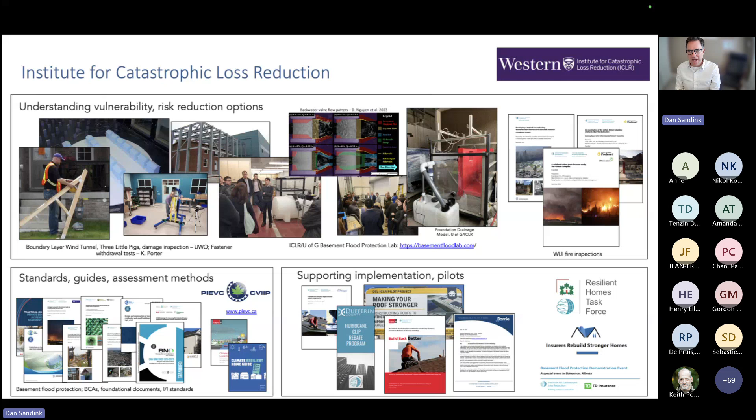One of the foundational issues we've been dealing with over the past few years is that we have guidance available for the insurance and building industries on reducing risk of the built environment, of homes, of low-rise structures, to the impacts of some of the most important drivers of loss in Canada, including wildfire, urban flood, high wind, and hail.

But that guidance typically has not been implemented. There are very few examples of where this work has been implemented.

To take an example, we've got the National Wildfire Guide for Canada, developed by NRC and released in 2021. We've got various standards focused on urban flood protection, like CSA Z800, guidelines on stormwater and wastewater system design to reduce risk from extreme events.

A few years ago, we were involved in the CSA S520 high wind protection standard for Part 9 buildings. And for many years, we've had guidance documents and testing standards for roofing products to help performance in hail events.

So despite the availability of this material and a general level of awareness in terms of what part of the country is vulnerable to these hazards, we've seen very limited uptake to date.

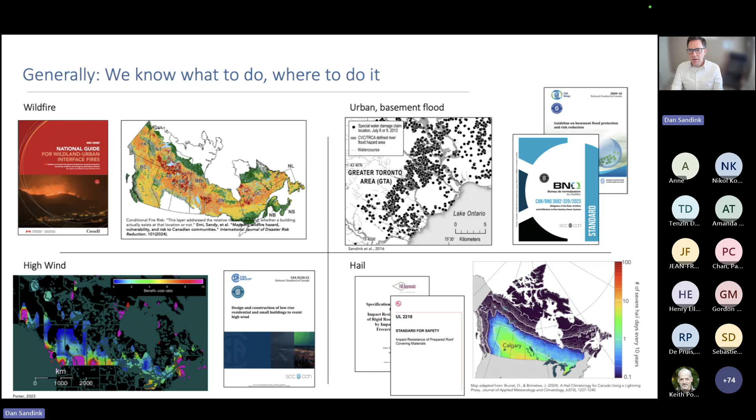So we approached the Canadian Home Builders Association a couple of years ago and proposed that we work together to find solutions to increase capacity of both the building and insurance industries to apply resilience practices for buildings, for new construction, for renovation, and for post-loss rebuilds.

We worked with CHBA to define what we called the Resilient Homes Task Force. This is a group of insurance industry executives and building industry executives, largely building company owners or senior staff, who helped us identify a roadmap to move from isolated application of resilience practices

to more mass adoption of resilience practices in these two industries.

The task force is composed of building industry executives and insurance industry executives. Our co-chairs are from the building industry, Alex Miller, who is CEO of Big Block Construction, based in Saskatchewan, and Susan Pinwarden, who is Managing Director of Personal Lines at Aviva Canada.

And I'm going to focus on a few outputs of this work today, notably the guidelines and the field trials. There are several other outputs we can talk about at some point in the future, but these two major outputs were considered by the task force to be the most important outcomes of the last couple of years of work.

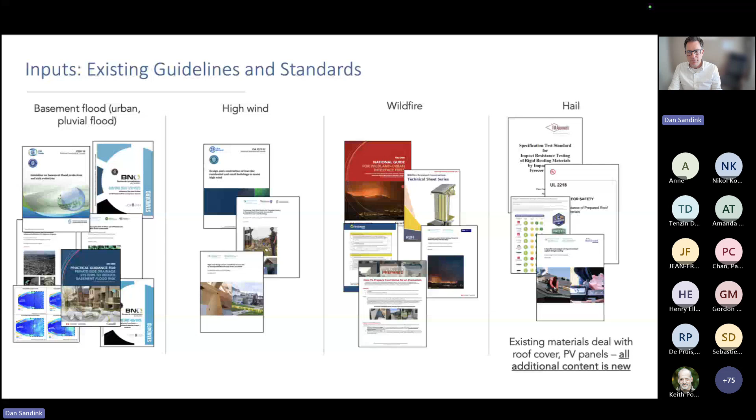Another important input for our guidance document. So the concern of the task force is that we produce practical guidance that can be adopted readily by a building company, by trades, by a restoration contractor, without a lot of interpretation by outside experts. In order to help with this, we put together what we called a pilot working group. This was more technical staff from building companies and insurance companies.

So we had a general technical support group with builders like Mattamy, Minto, Avalon, RDC, Doug Tarry Limited, Third Generation Homes, medium-sized and tract builders to help guide us how to present resilience practices in our guidelines and make sure that it's usable in the field. And we also had input from insurance partners, Aviva, Curo, and TDI as well in this task group.

We also brought in expertise from supporting groups like RDH, FireSmart Canada, for wildfire, for high wind. We worked closely with Sarah Stevenson from Canadian Wood Council, Doug Tarry and his team at Doug Tarry Limited, who had been leading a lot of this work for the construction industry in Ontario. For hail, we worked with the Northern Hail Project, Travis Engineering, as I mentioned before. And we also had input from large loss teams from some of the participating insurance companies like Co-operators who provided input to our guidance as well.

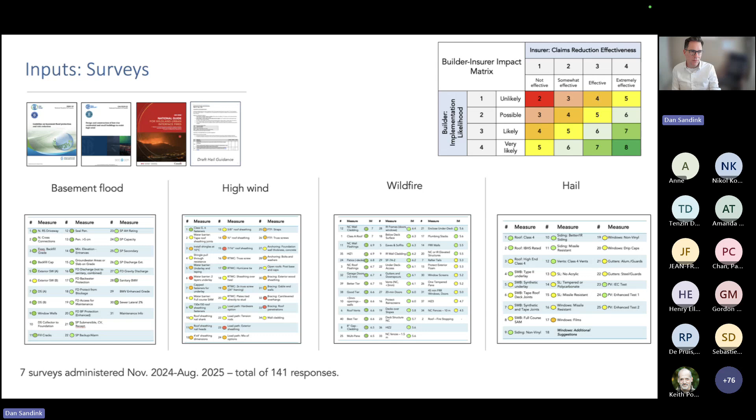The tables on the bottom of the screen are a summary of these inputs where we inputted the outputs of the surveys into this impact matrix, and then we're presenting this information. The more green you see, the more likely builders are to implement the measures, and the more impact the insurers reported that the measures would have on reducing claims frequency and intensity. And so again, that helped us prioritize options for our tiered resilience measures. We conducted these surveys from November 2024 through August of 2025, and we had about 141 responses, half from the building industry and half from the insurance industry. The building respondents were largely building company owners, and they were from across Canada in both cases.

Another sort of core piece of advice that we were acting on from our pilot working group was how to present options. And so this is a summary of their most important advice in terms of how to present options in our guidelines. They told us to use simple language, avoid technical terms like don't say 8d nails, just give a nail length, for example. Don't reference testing standards if you can avoid it. Assume users of these guidelines don't speak English or French. In many cases, trades on site are subcontractors and are not English or French speakers, so they should be interpretable by people despite their language.

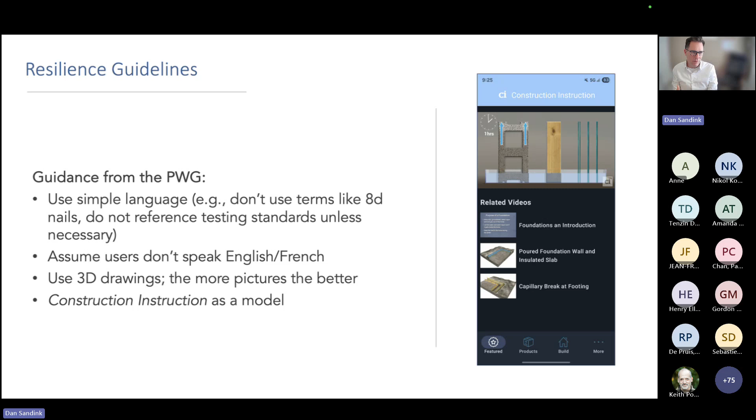We were advised to use 3D drawings, pictures to the extent possible, so reduce reliance on words, use pictures to the extent possible. And we were also pointed to the construction industry resource called Construction Instruction as a model that we should be working toward in our resilience guidelines.

Aside from the checklist, we have additional content. We have introductory material. I'll talk about that in a minute. We have the checklists themselves. We have a large set of technical sheets, and then we have documents that outline insurance incentives.

So the introductory material, standard introductory material outlining what the task force is, what our objectives were, and also being clear that we intend to iterate these guidelines. We want to update them based on feedback from users over the coming years. So what we're releasing now are the first versions. We will continue testing them in partnership with builders through field trials, receiving feedback from insurers and so on. And we'll update these guidelines over the years. So we wanted to make that clear in our introductory materials.

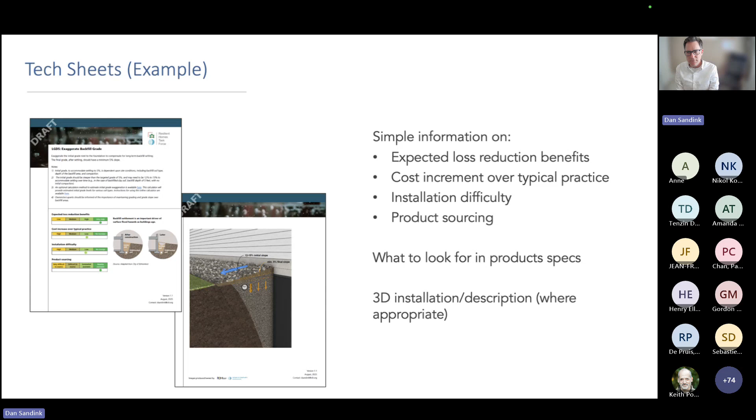So this is an example of a presentation of a basic checklist and the technical sheets. This is our good tier checklist for hail and the accompanying technical sheet. So the intention here is that a building company owner and executive could take the checklist and read very quickly the resilience measures and understand what potential measures they could apply. And if they want more information, they can go to the technical sheet that provides technical standards, what to look for in technical specifications if you'd like to select specific materials, and also diagrams of what those practices look like as applied in a building.

And so this is the good tier for hail. This is really the simplest checklist that we have. And this is an example of the better tier. So building on that good tier, adding additional measures with the supporting checklist. This is the way that this information will be presented to the building industry.

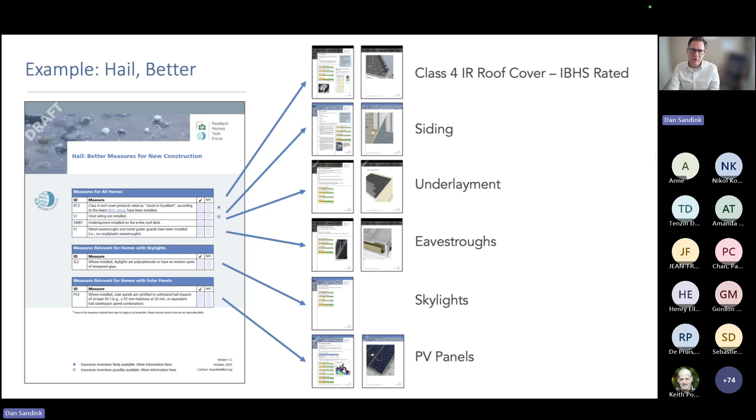So there are about 130 of these technical sheets. Right now we have released basement flood, hail, and high wind in English. They'll be translated as well. They're available at this website, and we will update, as I mentioned before. So go and check periodically for updates at this website. And if you have feedback, if you're looking to review or apply these guidelines, we'd be very happy to receive your feedback as well. So now moving on to the field trials.

And so we wanted to not develop our checklists, our guidelines based on meetings and desk-based assessments. We wanted to go out into the field and work with a builder and apply the checklists, apply the resilience guidelines to understand whether they could actually be applied in practice in the field. So the goal of our field trials was not necessarily to apply all of the resilience practices. So we have a long list of resilience practices, over 100 potential measures that could be applied.

The goal was to have the builders work through each of the practices and provide us with feedback in terms of their practicality, the impact on the potential sale of a building, how they interact with other components or other systems of a building, to help us refine the guidance and present it in a more usable way. And this information, again, helped us define good, better, best options. The easier practices, the more practical practices, the practices where we didn't run into major cost or supply issues, were moved into the more basic tiers because they're more readily available for application by the industry. And the goal of these field trials was really to understand constructability and clarity of guidance as opposed to application of all of the resilience options.

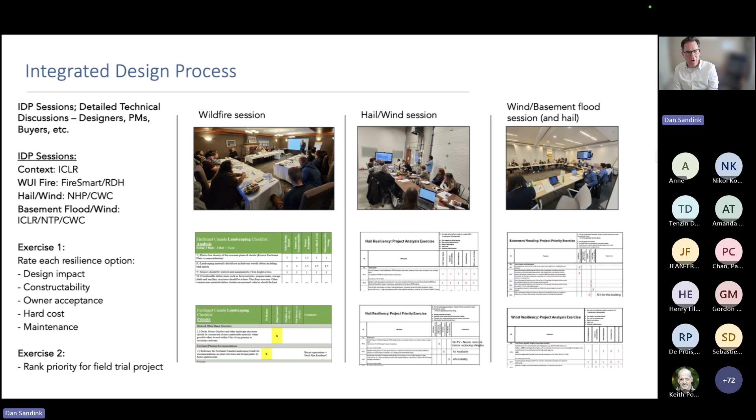And we are working with Big Block Construction on a wildfire pilot near Fernie, BC. We're working with Avalon on a hail and wind pilot in Calgary, and Empire on a wind, basement flood, and hail project in Southern Ontario. And I'll provide some detail on each of those projects. So first, I'll go through quickly where we are on these pilot projects. They're not complete.

The builds are underway, or in some cases, they haven't started yet due to permitting issues and so on, not related to our measures, but other issues.

The first project we started was with Big Block Construction. This was a site near Fernie, on the Fernie Alpine Resort in British Columbia. This is a wildfire demonstration project. The building itself is located very close to, or abuts, an area of extreme wildfire risk due to vegetation, fuel type, and slope. It's a high-risk area. The building on the bottom left is the rendering of the building we're working on with them.

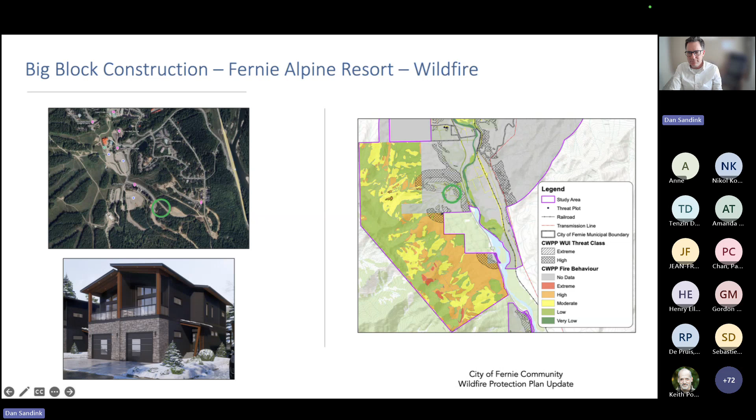In this case, we worked through each of the resilience options for wildfire, drawn directly from the NRC Wildfire Guide, presented under our best tier. These buildings are already partially in compliance, not because of wildfire resilience, but because it's an upper-end development targeting the upper end of the market. So it had fiber cement siding, steel roofing, stone veneer siding, and so on. We'd already achieved a lot of our wildfire resistance practices just due to the aesthetic desire of the builder. The table on the left shows each of the resilience practices we worked through with the builder. The green cells indicate practices they intend to apply, with some initial costing estimates for those measures. The yellow highlight are measures they are likely not going to apply.

The green measures include things like Class A roof assembly, which was going to be applied anyway since it was steel roofing, non-combustible siding, and so on. These are fairly acceptable or practical measures available to the builder that added not a huge increase in cost.

But the measures we had some resistance on were windows, fire resistance ratings for walls, and addressing garage doors. These were expensive and somewhat technically complex practices, adding a lot of cost to the build, so they likely won't be included. Also, due to the phase of construction we became involved in, some practices would result in a slight change in the building footprint, so we couldn't apply them in this case.

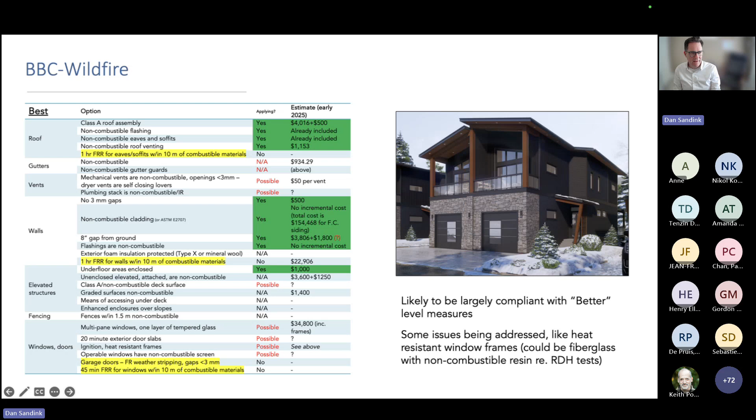But the conclusions were that a lot of the practices were practical, and we had very good buy-in from this builder. In fact, they look to apply these practices by default in future projects.

The next project is the field trial in Southern Ontario. We're working with Empire Communities on a single-family detached home in Caledonia. This is a site they're building out with several hundred homes. This home was already a demonstration home for net zero, embodied carbon, and indoor air quality practices. Resilience was added later in the design process, which added a bit of complexity in terms of application, but we were still able to achieve a lot of our goals.

I'm going to present some numbers that include costing for resilience practices. I should highlight that because it's a demonstration site, there are no competitive bids for application of these measures, so the numbers are likely a bit on the high end. But it's an indication of the potential increase in cost for some of our resilience options.

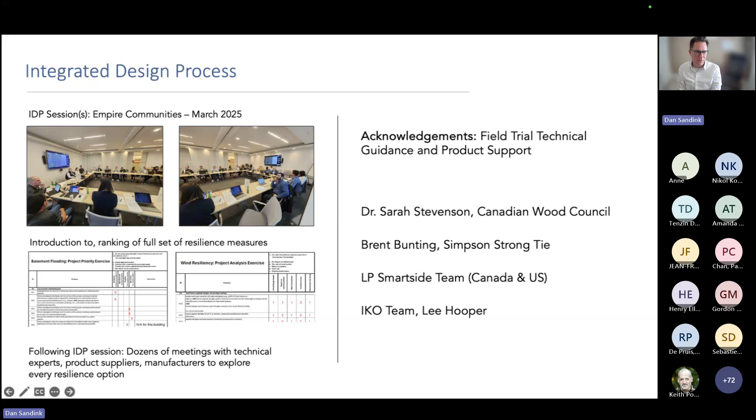Again, we had an IDP session with Empire back in March. I should acknowledge some of the partners in this field trial: Dr. Sarah Stevenson from Canadian Wood Council, Simpson Strong-Tie, Brent Bunting, the LP SmartSide team, and IKO. Simpson, LP, and IKO were all donating product for this project as well, roof cover, siding, and structural connections.

One of the first things we did was understand if there was a flood exposure at this site, near Caledonia. We used the Grand River Conservation Authority flood maps to identify flood exposure. It's not in a floodplain as defined by the Grand River Conservation Authority. We also used Professor Simonovic's future flood forecasting tool. Even under a future scenario using RCP 8.5 and a 500-year return period flood, it's not vulnerable to river flood.

However, our insurance partners informed us that this site is considered vulnerable to pluvial flood and sewer backup, due to historical flood occurrences in this area. This is south of Hamilton, and we've had a lot of flood events in this area in the past, on Hamilton Mountain, Binbrook, and so on. So it is considered high risk by the insurance industry for pluvial and sewer backup flood risk.

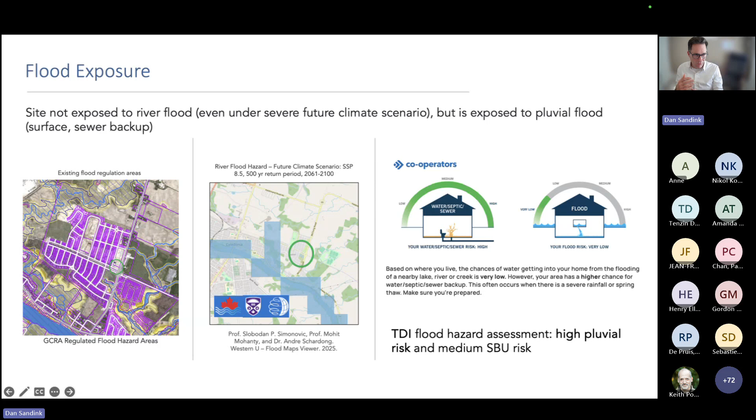Because of the exposure to flood risk, we wanted to incorporate as many basement flood protection practices as possible. This is an example of application of our basic or good tier practices for basement flood protection. The checklist on the left indicates the practices that the builder is applying.

Many of these practices are already required on the site, like lot grading and drainage, backwater protection, and so on. These are practices that are already required, so we can include them as achieved through our tier, but they don't actually add cost to the builder.

The only measure that was in our basic checklist that was not planned to be incorporated from the outset was backup power for the sump pump and an alarm system, and that was about a $1,700 upgrade for this build.

We also worked with the builder to include a secondary sump pump. So this home is serviced by a sump pump. It doesn't have gravity drainage for foundation drains. So we incorporated a secondary sump pump.

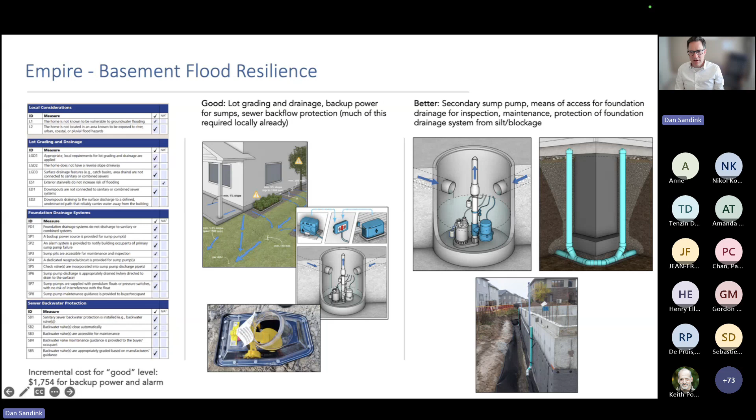We also included some measures for maintenance to allow for maintenance of the foundation drainage system, like access pipes, access down pipes, and changed some of the design of the foundation drainage system to reduce risk of blockage of that pipe over the life of the building. And that's an example of what's going on down here.

We also looked at hail resilience for this site. The reason why we did this is not necessarily because it's a high hail prone region, but this is our demonstration site that is the closest one to the city of Toronto, and we'll likely be bringing out insurance groups to tour this site.

This was a low carbon building, so the initial proposal was that it would have vinyl siding, but we wanted to demonstrate more resilient siding practices for the site, notably for hail. Because we were applying better siding, the incremental cost for better roofing was very small, so we focused on that as well.

So we worked to achieve most of the basic and good tier practices for hail protection. That includes class 4 impact resistant roof cover. In this case, we'll be using LP SmartSide in place of vinyl. There's no skylight, so that didn't apply.

We're also working with the builder to identify PV panels that can withstand hail impacts similar to the UL 2218 class 4 test for roof cover. So the PV panels and the roof cover will have a similar level of resistance to hail impacts.

We've gotten most of the way to our better tier as well by adding underlayment, which we were adding for wind protection anyway. The incremental cost of achieving these measures for the better roof cover was roughly $3,000.

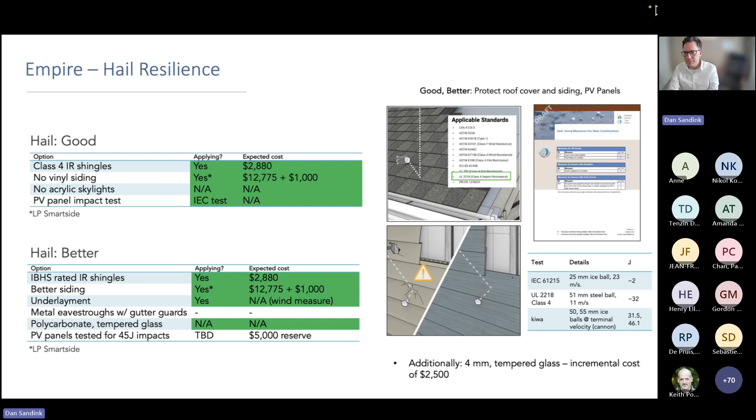And finally, wind exposure. This is one of the priorities of Empire. They wanted to understand options to reduce wind exposure for their buildings. They build not just in Canada, but in the US as well. So we wanted to work toward implementing the good and better tiers for wind protection.

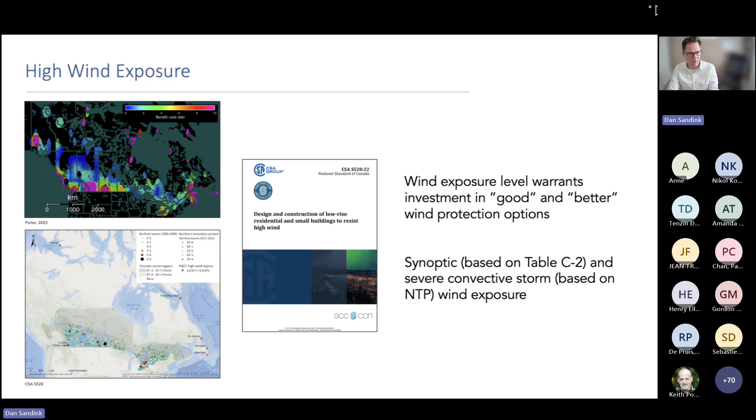As I mentioned before, wind protection is based on CSA S520. This part of Canada is prone to tornadoes, and also synoptic wind events, such that investment in wind resilience would likely pay for itself over the life of the building.

So in our two tiers for wind resilience, we have different practices. The basic tier and the good tier focus on roof cover. The basic tier measures for roof cover.

The good tier includes roof cover that complies with ASTM D7158 Class G or better, which is essentially a wind gust of 100 to 120 miles per hour. Essentially any laminate shingle product in Canada meets this resistance requirement, but we just want to make sure it was applied. So this was not an incremental cost because the shingles they were selecting already complied with the standard.

We also are incorporating underlayment, which is about a $1,500 increase in cost over expected cost. There's some basic tier sheathing fastener requirements, like 6x6 fastener patterns for roof sheathing and longer nails for roof sheathing fastening.

And then also roof to wall connections, and I'll talk about that later on, but that's essentially hurricane ties or truss screws to tie the roof structure onto the building. That's our basic tier, and we were sort of easily able to comply with this tier.

We also worked toward application of most of the better tier measures. That included thicker roof sheathing, so they're using 7/16 inch roof sheathing. And I'll talk about the vertical load path measures that were incorporated into this building.

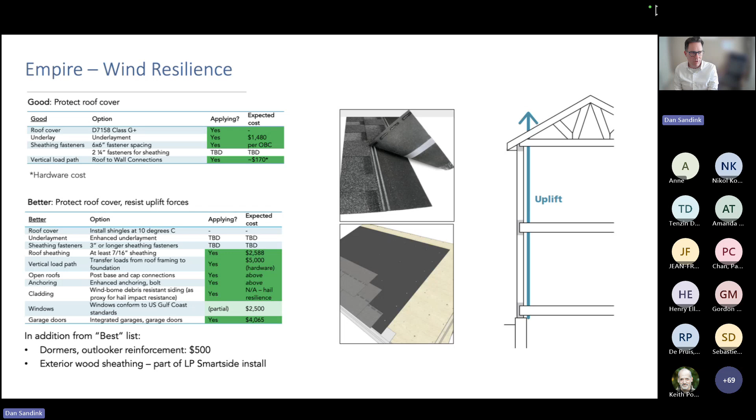So now some details on the vertical load path improvements. This is one of the big areas of work over the past few months, was to work with the builder, with Simpson Strong Tie, and with Dr. Stevenson to identify a practical approach to improve the vertical load path for this building.

One of the first things that we ran into in this case was that, as I mentioned before, this is a low carbon demonstration project as well as a resilience demonstration project. So the builders were using I-joists instead of timber joists. So they didn't want to use truss screws. We had to find alternatives to truss screws because they didn't want to drive truss screws into the lower and upper chords of the I-joists because they were concerned about splitting the chords.

So we worked with Simpson Strong Tie, and we identified an alternative product. It's a floor-to-floor screw that you screw through the bottom plate of the upper story into the top plate of the lower story, and you bypass the joists altogether. So the joists are not touched. We just have the structural connections going directly from the bottom plate into the top plate of the lower story.

And then we use truss screws for the stud to top plate connections and stud to bottom plate connections throughout the building. We used a hurricane tie for the roof to wall connection, roof to upper story top plate connection, and then a combination of a threaded rod and a bolt, a specially designed bolt where the rod threads directly into the anchor bolt in the foundation, again trying to bypass screwing anything into the joist. We're going directly to the foundation through the bottom plate and sill plate for the lower story to improve anchoring of the building.

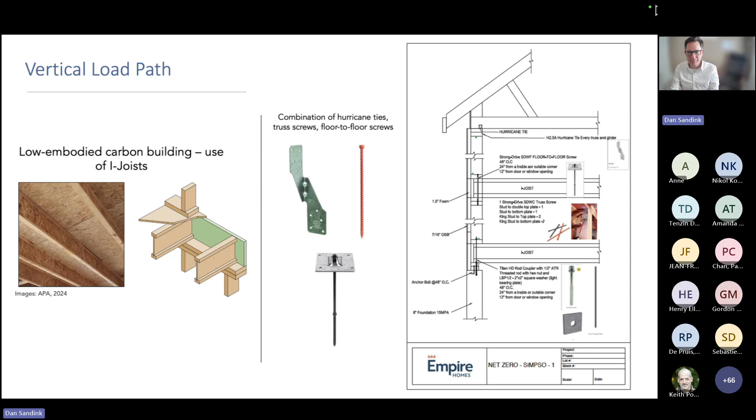I won't go into more detail, but this was somewhat of a complicated building with cantilevered overhangs and so on. So it took a fair bit of work to identify individual connections that could be made at different elements of the building.

So a lot of work was put into this, and we were really pleased and impressed with the team at Empire. They really spent a lot of time to understand this work and really provided, I think, a really good model for other builders that might choose to go down this path.

So there's some other details here for the structural load path for the walls above the garage, the tall walls that are beside the stairwell and in the garage, and for porches and so on. We also did some work on reinforcing the gable end walls based on the CSA S520 approaches, which is essentially a lateral brace that's installed in the roof structure for the gable end walls, and also reinforcing the outlookers, the overhangs on the gable end walls, based on IBHS practices.

So one of the end results of this pilot project was a very detailed list of structural connections, connection products, and prices for this demonstration project. And this is the first time that we've seen something this detailed from a builder in Canada.

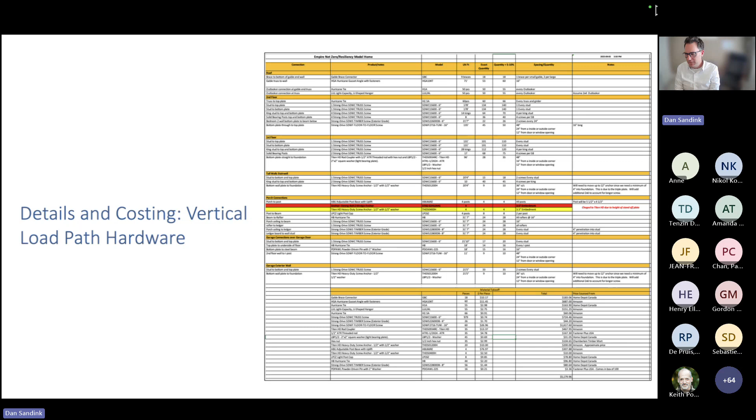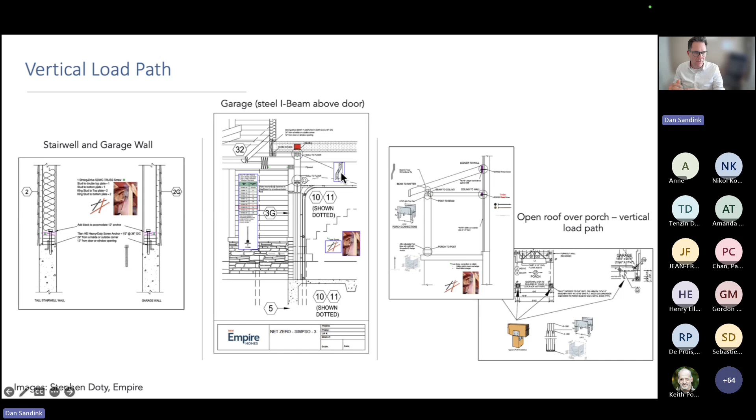So we really have a good baseline for any other builder that would like to pursue this approach, with each of the connections broken out and potential products that could be applied to achieve uplift resistance for each of these connection points in the building. And the overall cost for all of these additional structural connections, all the screws, the floor-to-floor connections, the roof-to-wall connections, and so on, for this building, for the entire building, was about $5,000, but that's before labor.

The status of this build as of early December, as of last week: framing is underway currently. In late November, the foundation was poured, and we worked with them through that process to make sure we could achieve our goals with respect to building sewer grades, backwater valve installation and grade, and some practices for protection of the foundation drainage system from clogs and silt over its life.

We'll be going back to check out the structural connections in the next few weeks, or in early January.

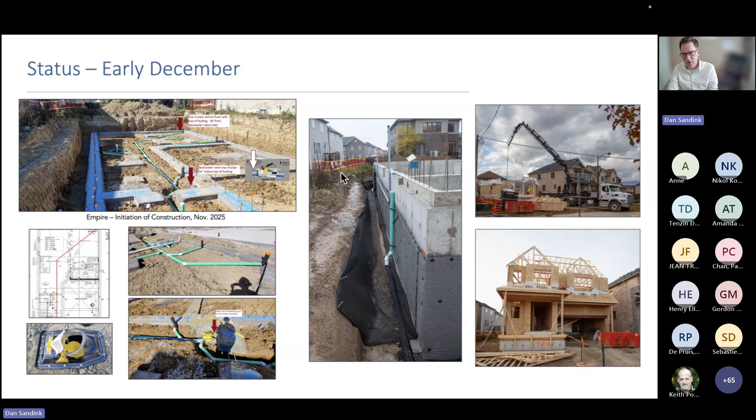An additional project I'll go through quickly is a MURB site in southern Calgary, the Belmont area, the Avalon project. In this case, they were working on applying hail and high wind practices, applying most of the good and better tier hail protection practices, as well as class 4 roof vent rated products. So aside from roof cover, also roof vents rated to class 4, and most of the good tier and several of the better and even best tier resilience practices for high wind will also be incorporated into these projects.

In many cases, these measures were not a significant increase in cost - it was just a matter of requesting a supply from contractors. For example, high wind rated roof cover shingles - most products already comply - but underlayment and other practices were an additional cost.

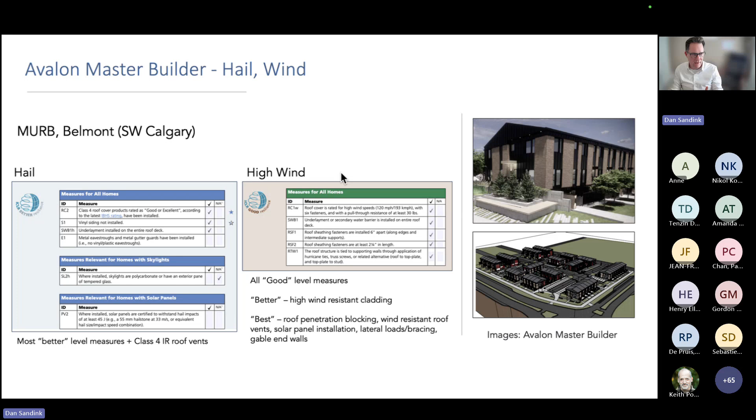One final project to notify the group of quickly is a re-roofing project we're running with Durham Region. The first three projects I talked about were for new construction. This is an existing construction project where we're working with roofers in Durham Region to apply wind resilient re-roofing practices for five or six, or maybe a few more homes in the Durham region.

In this case, we are incenting the roofing contractor directly for applying high wind rated shingles with a tighter nail fastener pattern - six nails per shingle rather than the standard four - and also encouraging installation during the warmer months, plus installing underlayment with a tighter nailing pattern. Those are the elements we're focused on for this re-roofing project.

In the case of existing buildings, it's often more complicated and more expensive to incorporate resilience practices. The goal of this project was to understand what we could do for wind resilience on re-roofing jobs at reasonable cost with low complexity for the roofing industry. The incremental cost for these practices that we're supplying to the roofing companies is about $4,000, and we'll have some results to share - we'll post that on our Resilient Homes Task Force website in the coming months.

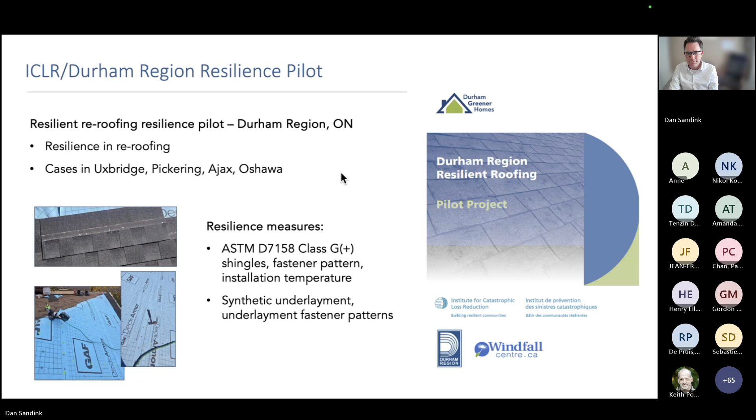As I mentioned before, the field trials were meant to verify and help us develop the resilience guidelines. We've gotten through the design phase of the field trial projects, and we've incorporated lessons from application of our guidelines into the guidelines we're producing through the task force. An example of the outcomes includes treating more carefully some of the practices that are very difficult for builders to apply - we're not removing them from our guidelines, but we're treating them differently.

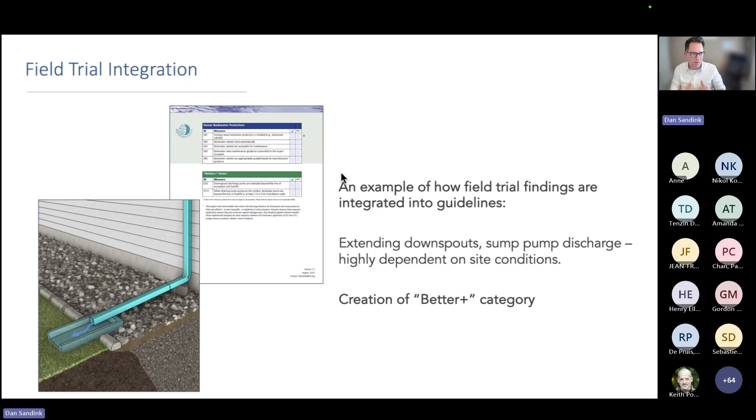An example of this was the Empire site, a very tight lot situation where there's not a lot of room between buildings, so we weren't able to achieve things like downspout extensions or sump pump discharge extensions, and we relaxed those measures. The goal here is not to have a builder walk away from a resilience project altogether because they can't achieve a few select practices - it was to get these practices on the table and help builders become aware of them, more so than widespread application. So this is an example where we moved these more difficult practices into a different category for our resilience guidelines.

Similarly, for uplift resistance in the Empire project, initially we were working with a design load related to EF2 tornadoes. As we started looking to address that design load, it was becoming extremely expensive and difficult, so we changed our better practices to focus on achieving improved uplift resistance to the extent possible given time, cost, and available resources for the builder. So we're improving the uplift resistance, but not necessarily achieving a prescribed uplift load - this is now our better tier for uplift resistance.

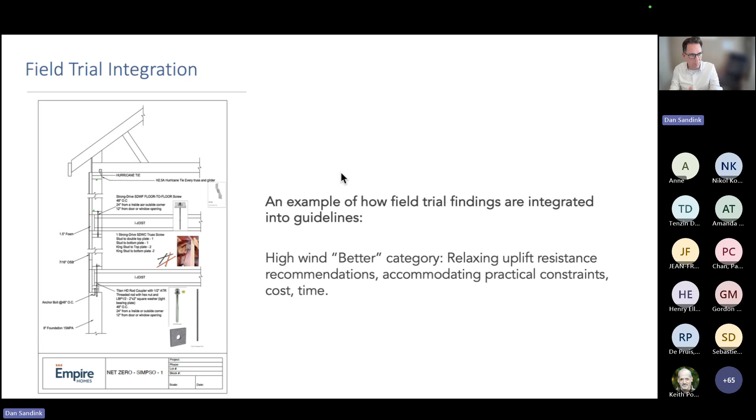And we'll also work with the builders for marketing outputs. So we don't want to just produce the technical outputs. We want to profile the builders. We want to find a way to get this information out into the building industry. So we're working with a videographer. We'll produce more public-oriented materials, as well as technical documentation of application of resilience practices.

So our videographer will be on site when these measures are being installed, and will record. And again, the idea is to get something like construction site practical guidance for the building industry, and we'll be producing that as part of the field trials as well. And I just wanted to note that the field trial work with Chris Williams and Avalon in Calgary has already been profiled in the media. So we'll be looking for opportunities like this in the future as well with all of our field trials.

And now we're moving to a phase of updating and iteration. So I wanted to really highlight that point, that the guidance documents that we produced are the first version, but they will have to be updated as they are applied by builders and insurers. So keep checking for updates if you're interested.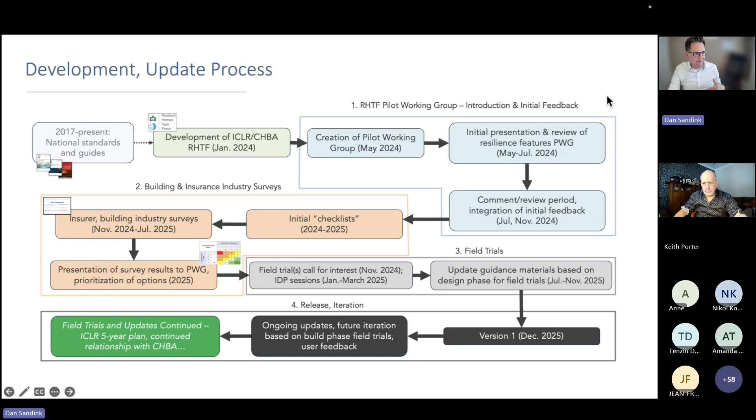So for hail in Calgary, several insurers are providing financial incentives. For water, sewer backup protection, this is fairly widely applied already by many insurers in Canada. Reduced premiums, better deductibles, higher caps, higher payout limits for flood protection, including things like backup power for sump pumps and backwater valves. Some insurers are providing incentives for wildfire protection. They're not huge incentives, but there are some incentives on the table.

But we also see incentives in the form of deductibles, of sublimits. And by sublimits, I mean in cases like sewer backup and water coverage, where there's a separate endorsement for that coverage and a separate premium. If you're in a high-risk area, often the payout associated with that endorsement will be lowered unless you apply resilience practices like backwater protection, sump pumps, backup power, and so on. And so this is already being applied in Canada. Availability is an issue as well.

Another big one is depreciation schedules. So for high wind, for hail, better roofing usually means that your roof depreciates slower, so you will receive a better payout later on. So my roof in Southern Ontario, the depreciation has started because it's over 10 years old. Every year it depreciates by 10%. That means my payout is lowered by 10%.

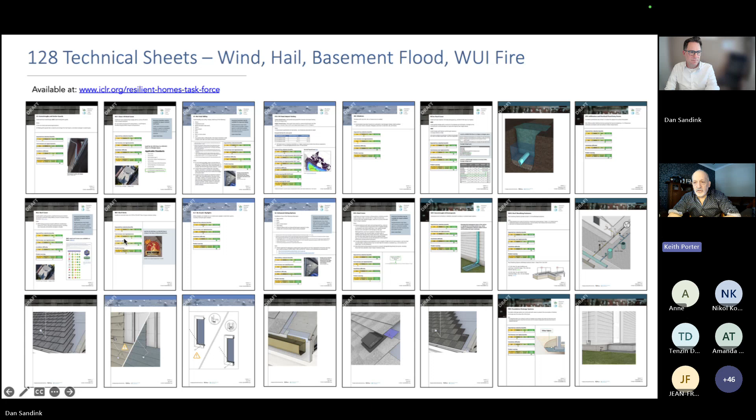Can you name some use cases where, I mean, you've said, okay, well, you want to use this stuff, maybe join us in meetings with builders to promote, pilot studies. Can you name one or two other ways that people on the call today could engage in this material and do something practical with it over the next few months, other than what you've already pointed out? Yeah, well, so I think in terms of the volume of material, there's a lot of material,

but there's no intention that any individual is going to review all of the measures or all of the technical sheets. The intention here is that a user is going to go to the checklist first, and the checklists are meant to be very simple. So if you are a homeowner builder in Calgary, you can grab the checklist and look at it very quickly. And that's been our experience to date, is that we can sit down with a builder, look at the plans for a specific site and very quickly work our way through the checklist.

Here are some characteristics of this building. You've already met this criteria, et cetera. In many cases, you don't need to go to the technical sheet to understand what the measure is. It's very simple, like class 4 roof cover. All you gotta do is call your supplier and say, I would like UL 2218 class 4. That's been our experience to date. The technical material is there if you have a question, or if you need more information, or if you're looking to actually install or source the measures, like if you're really seriously getting into application of the measures.